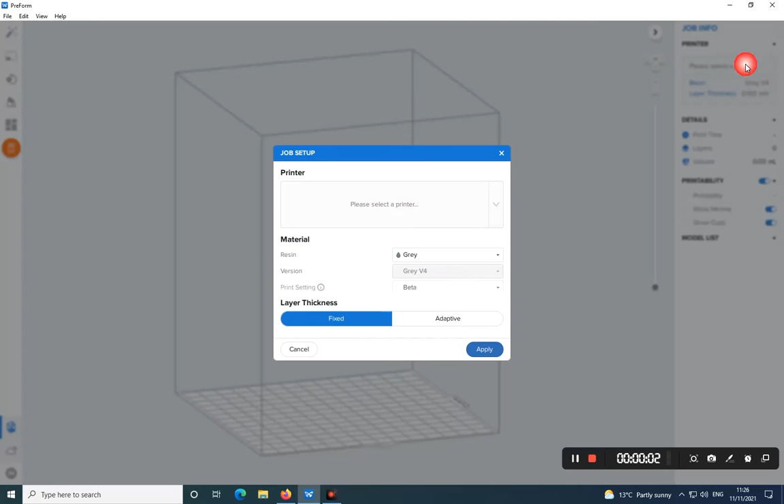In order to use the SLA printer, you'll first need to slice your model using the PreForm software on the attached computer. You will then need to select the correct printer from the top right window. This printer is Brawny Myzornis, and it should show idle. In this window you can select the material you are using, and also set the layer thickness, balancing between a rougher finish but a faster print, and a slower print but with higher resolution.

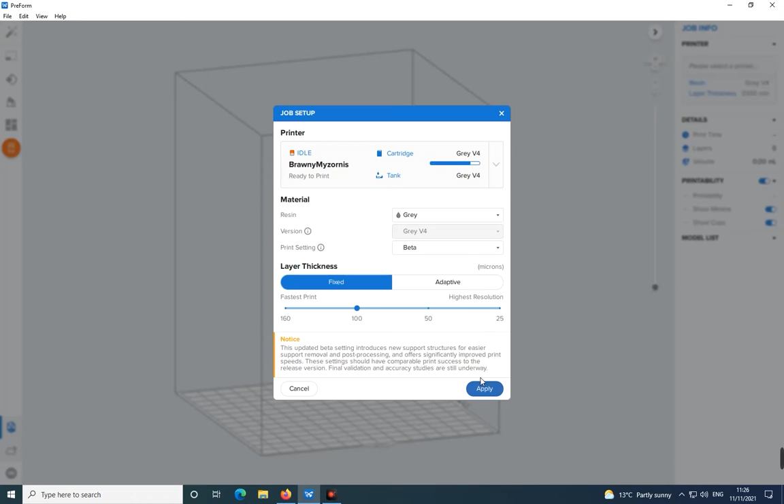You can then navigate to File and Open to import your model, which should be in an STL format. Once your model has imported, you can use the center wheel to move your object around the bed, orientate it in different positions, and scale it if necessary.

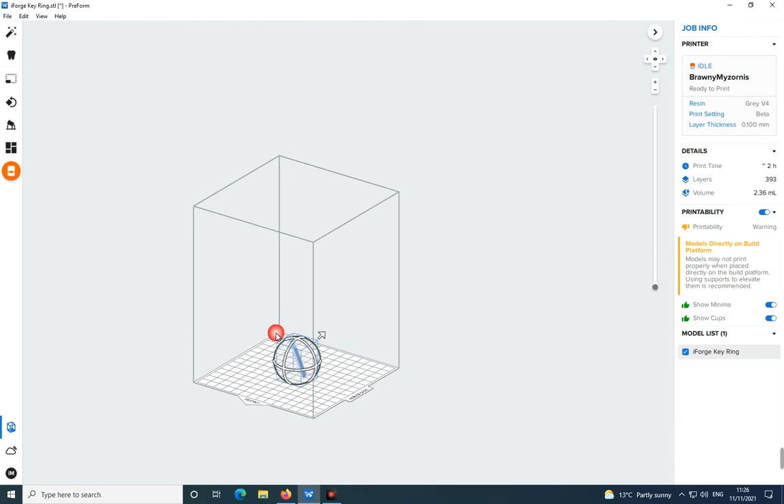Alternatively, you can use the one-click print function to automatically orient the object and set it up with recommended supports. However, you may not wish to rely on this in all cases.

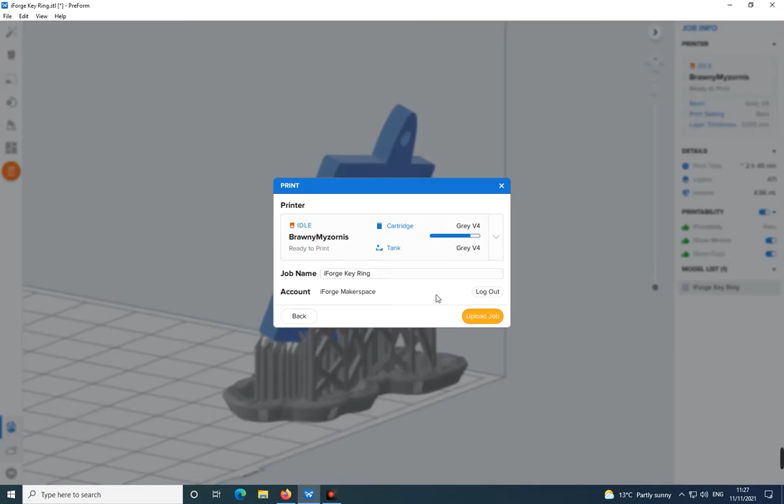Once you are happy with the layout of your model, you can upload the job to the SLA printer. Make sure you make a note of the time the print is estimated to take, and that you have booked adequate time on the machine to accommodate your print.

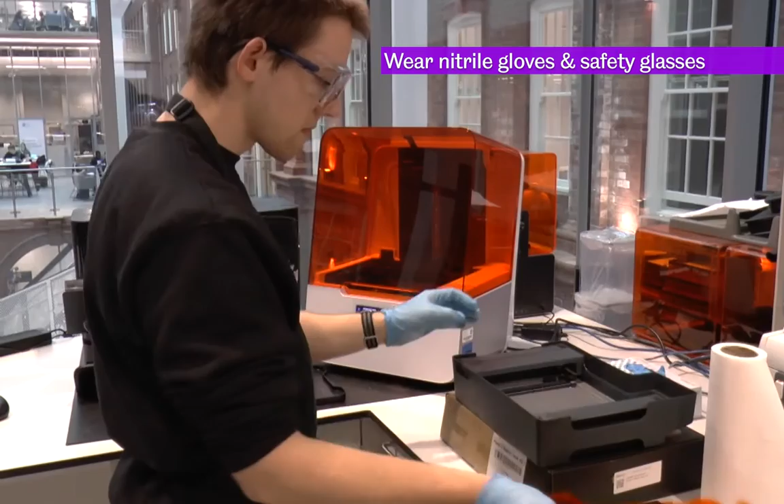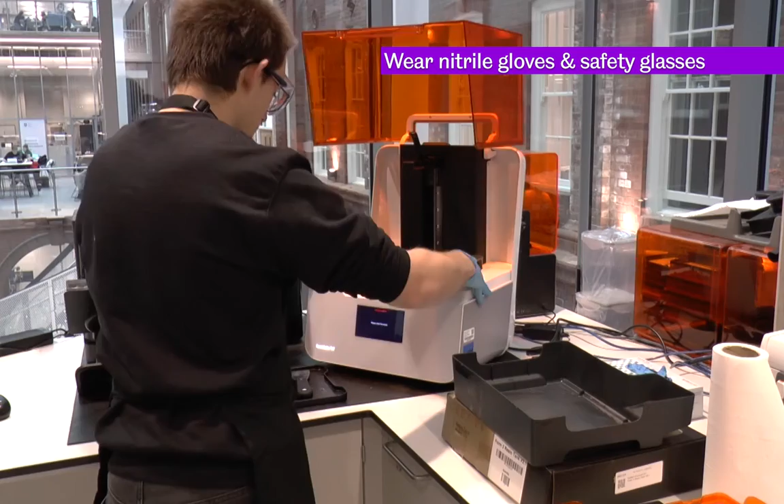Once you have sent your print file to the machine, you can begin setting up the SLA printer. First, you will need to install the resin tank into the base of the machine. To do this, lift up the cover and simply push the tank down and towards the base of the unit. Please remember to close the cover between any operations, as light will very quickly start to harden resin in the tank.

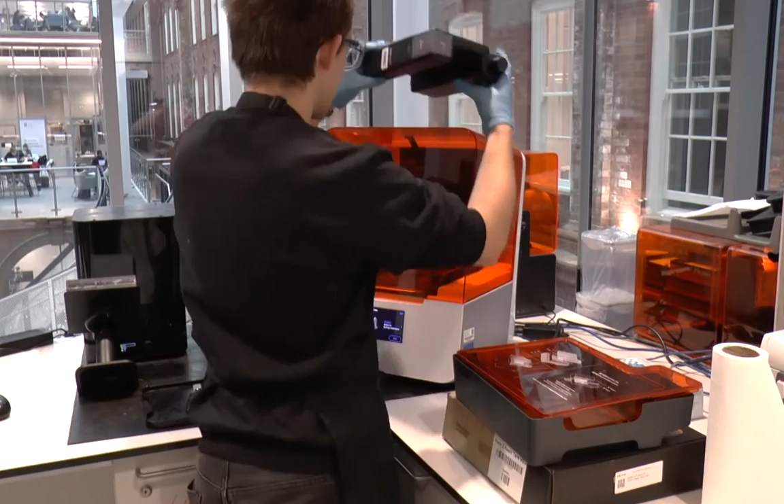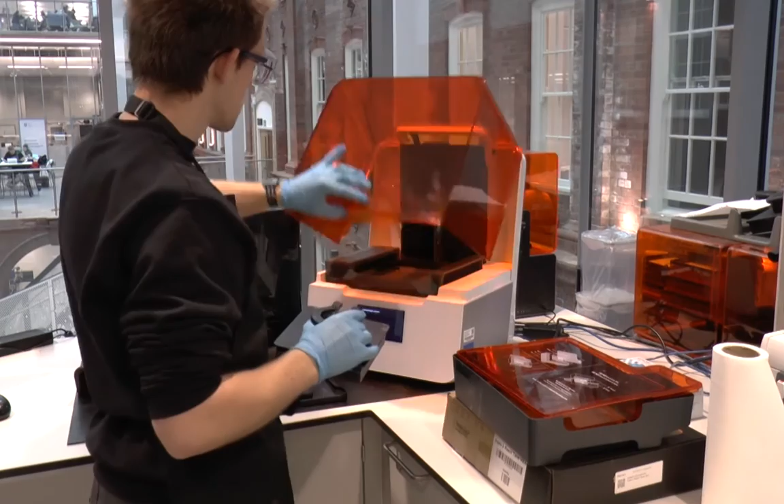Next, you can install the resin cartridge simply by inserting it into the slot in the back. Make sure that the material you have selected matches the tank that you have already installed. Finally, you can install the build platform by sliding it onto the top rail and closing the lever.

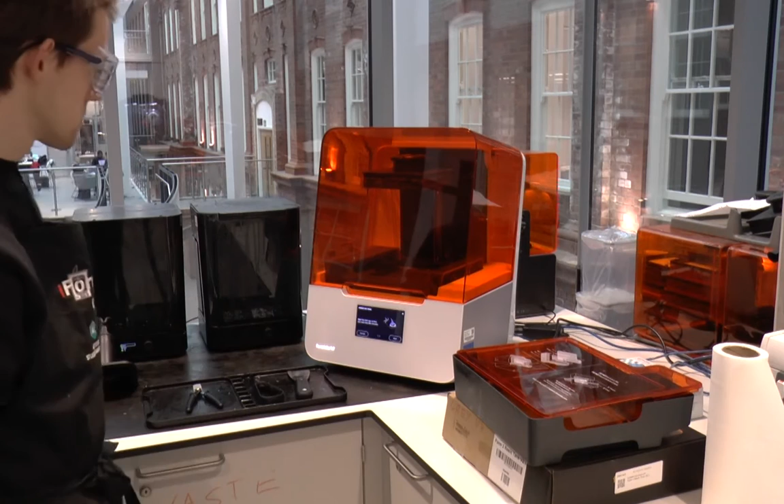You are now ready to begin your print using the touchpad on the front of the machine. Remember to check that the vent cap at the top of the resin cartridge is in the open position. This makes sure that resin flows down into the machine.

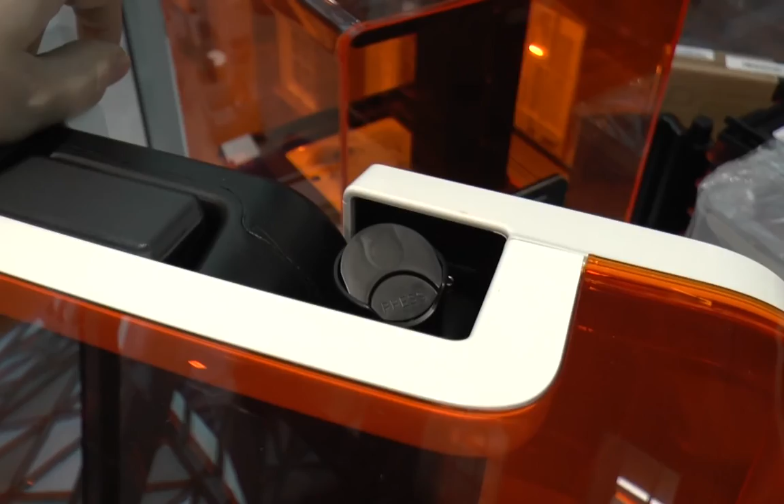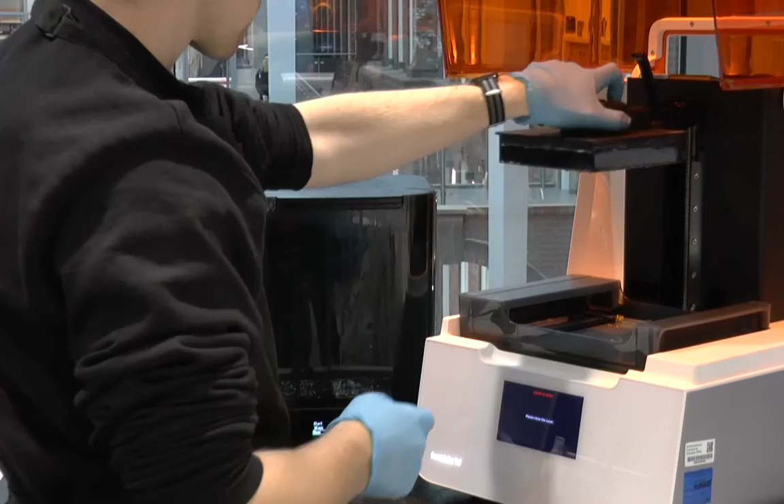Once your print has finished, you will need to carefully remove the build platform from the machine, ready for washing. Watch out for uncured resin dripping off the build platform. Make sure you have your nitrile gloves and are wearing safety glasses.

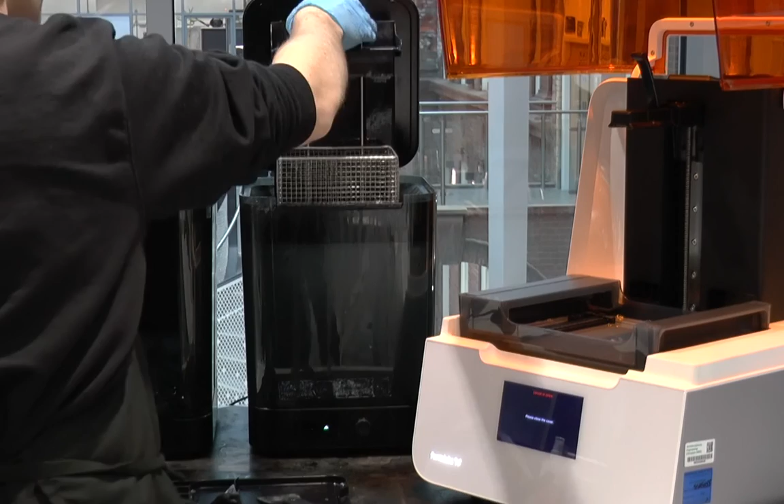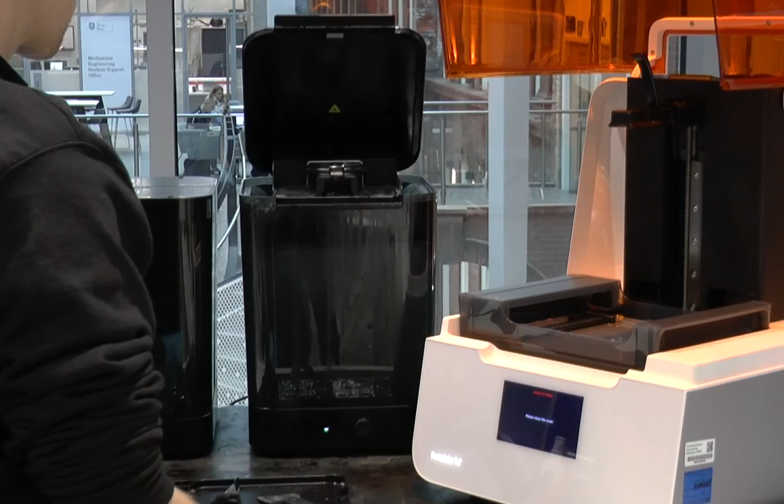Slide the build platform onto the top rails of the IPA washer and start a wash for the recommended duration of time given for that material. Remember to close the top vent of the resin cartridge prior to removing it.

To remove your washed 3D printed part from the build platform, use the holder and the tools provided. Make sure your hands are safely behind any sharp edges.

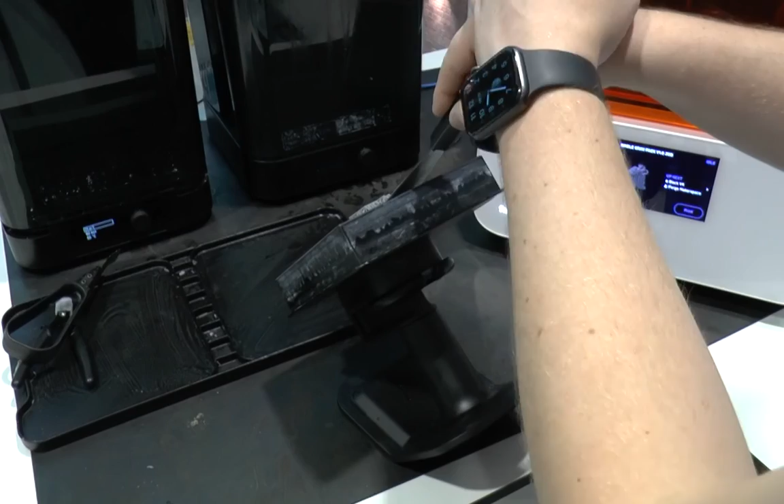Use the provided side cutters to remove the support material. Make sure you are wearing safety glasses while doing this, as sharp objects can fly off.

Finally, you will need to cure your 3D printed part. Set the length of cure according to the material recommendations.